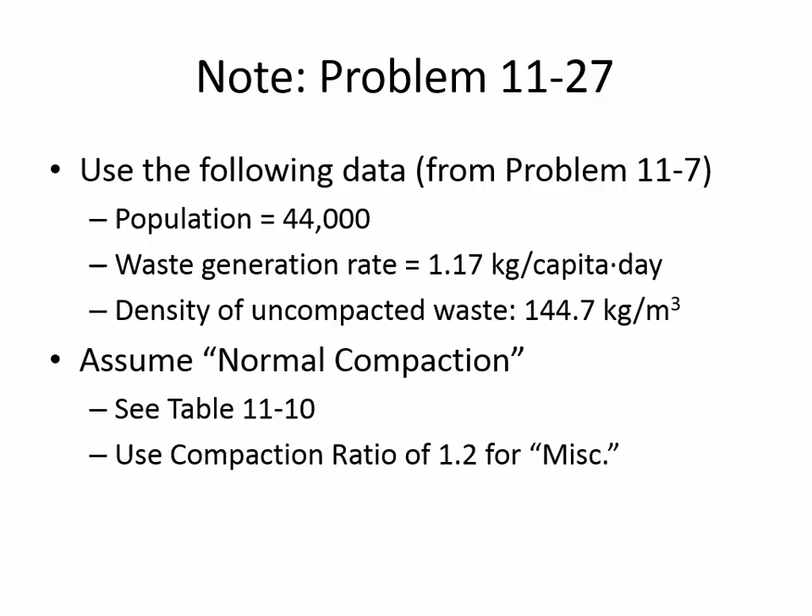Remember when we talked briefly about landfilling earlier in the semester, we discussed preserving the quality of groundwater. One potential source of contamination is that if we bury our garbage, rubbish, and trash, the metals, organic chemicals, and bacteria in those things filter down into the groundwater, which can cause problems related to human health.

What they'll do is extract samples, sometimes daily, sometimes weekly or yearly, depending on how old the landfill is and its status. They'll extract samples and test the groundwater for contamination. If they find anything—any organic constituents or heavy metals—that tells them the landfill has failed and needs to be repaired.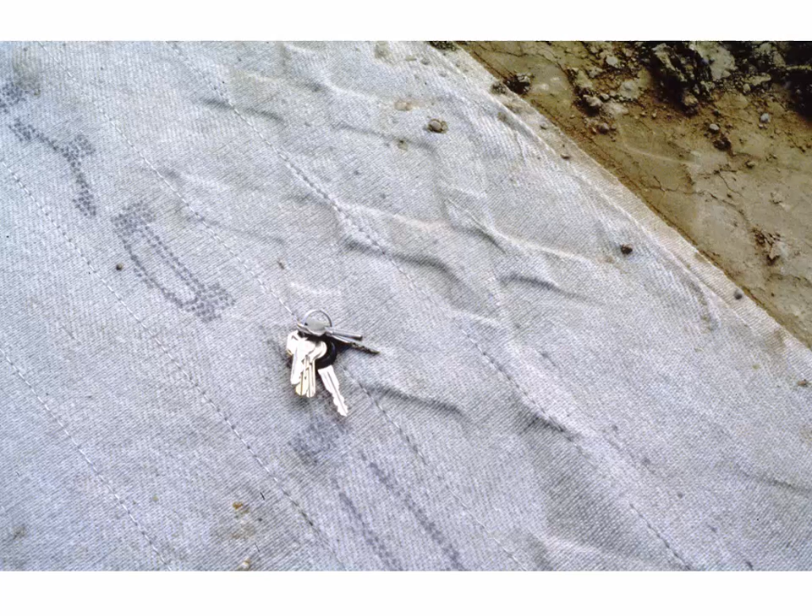The keys that are on this are for scale, to give you an idea that this is a really thick, heavy fabric. This isn't like clothing fabric. Down in the lab they have these bags that you put concrete in, like the heavy-duty bags that crushed concrete can go into, and then a forklift can actually lift the bag and haul it away. It's like the thickest, toughest fabric you can imagine, because a lot of earth-moving equipment is going to be bearing down on that fabric, so it's important for it not to tear.

As they lay out the plastic on big rolls, occasionally there can be imperfections in the plastic. It might be that there was a rock that somehow slipped through. There shouldn't be any rocks in the clay that's underneath the geotextile, but inspectors are always on the lookout for sections that need to be cut out and replaced. So they put a patch on a section like that.

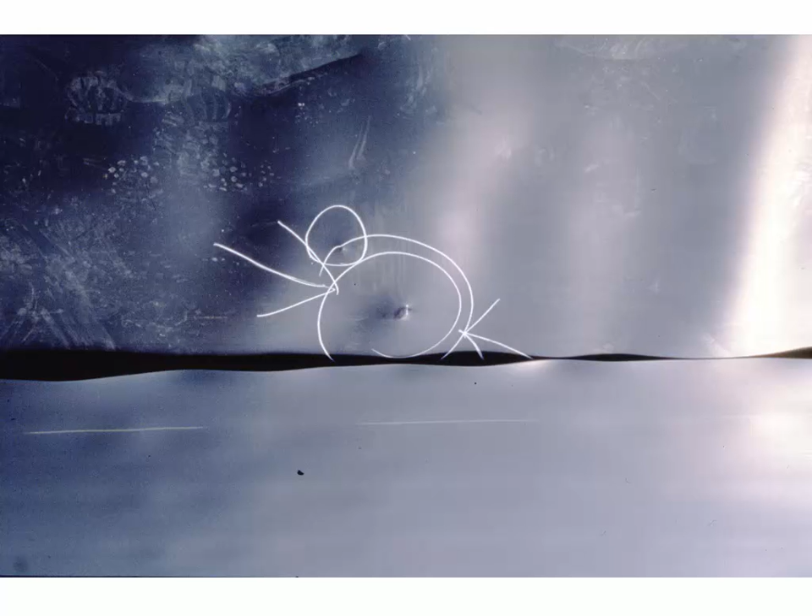You can see the consequences of carelessness. The geotextile can rip, and so that whole section would have to be replaced.

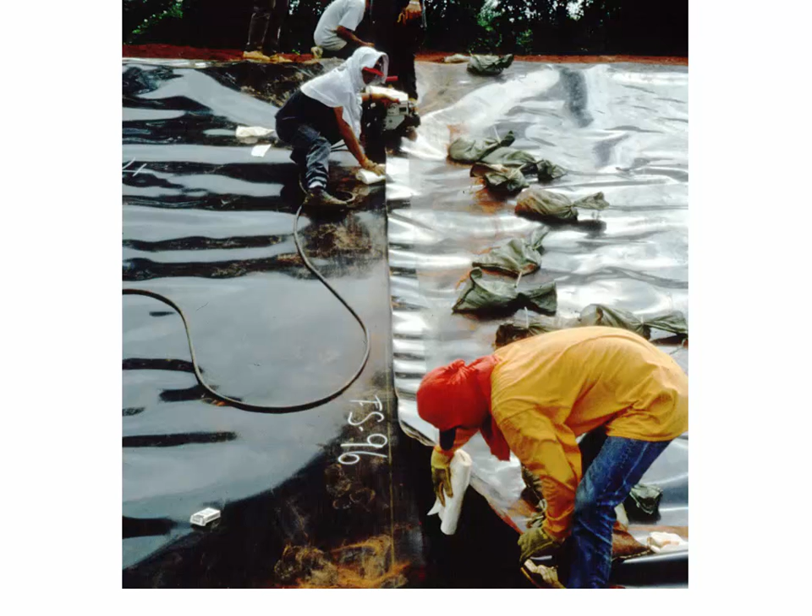So they lay out the rolls, and because they're going to need so much more plastic than one roll, you can't have a section of plastic that's 100 meters wide, so they do it in sections, and then they seal those sections together with thermoplastic welders. They have heat guns that can fuse the plastic layers together, and they actually put two different seals to join it. They have an overlapping section of plastic, with one seal on the left, one seal on the right, and let me show you.

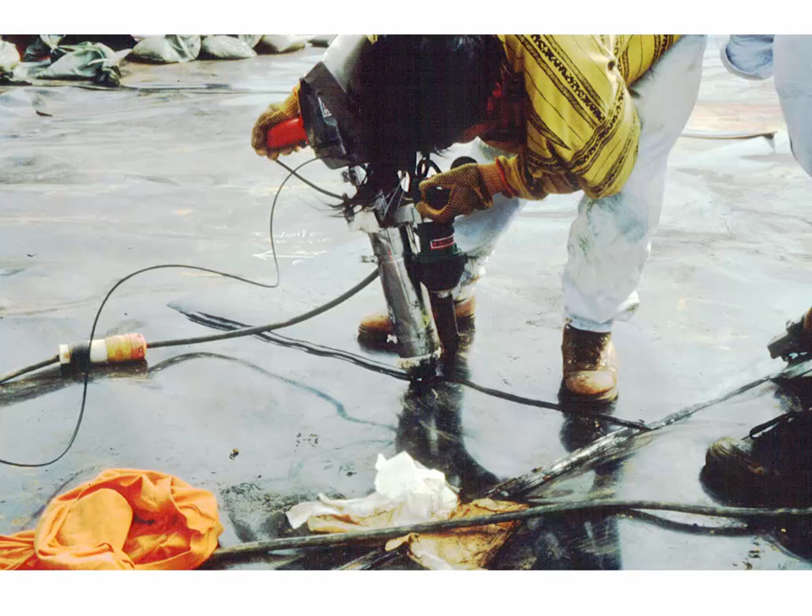Okay, yeah, they're heat sealing it here. More heat sealing. What they're doing is they're testing to make sure that the heat seal is airtight and watertight.

So they'll poke into it with a needle, use a pump to make sure it can hold a certain pressure, wait for a few minutes, make sure that the pressure is holding. That tells them that the welds in the plastic are good. Then they pull out the needle, put a patch on top of where the needle hole was, and then that section is essentially one continuous piece of plastic. It's kind of an ingenious way to make sure that there aren't any holes in the joining of those two sections.

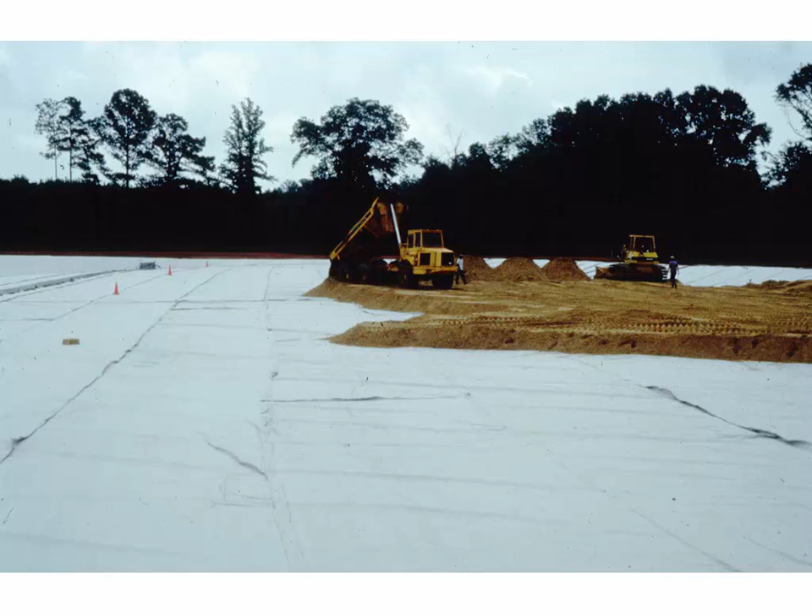No, this is at the beginning of the landfill before the first garbage is brought in. So that's a good question. They would put in all of the plastic for the whole landfill at the beginning, and then they would load it with the first initial layer of soil, and then they would start to bring in the garbage.

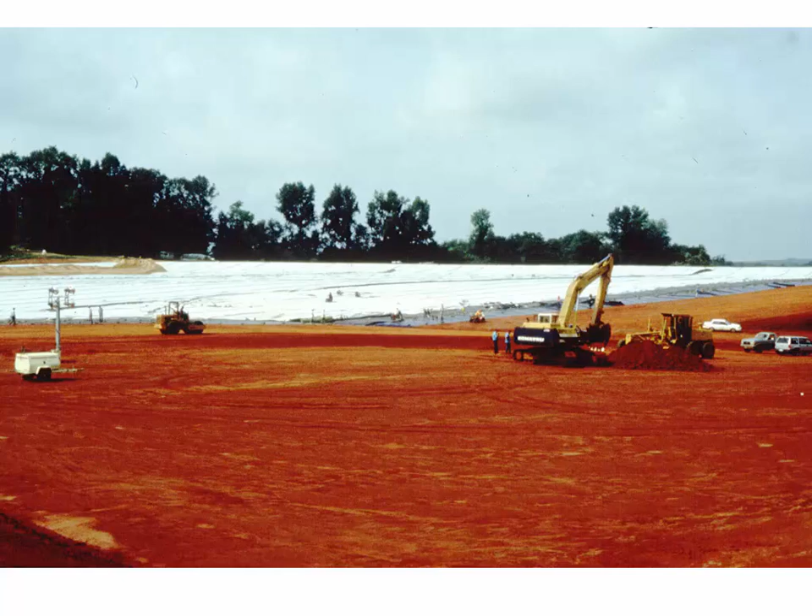And so this is a pretty specialized thing. The people who are laying this out and sealing it together, they travel around the country or the world. They're not staying in the same place every day doing this. All right, so I jumped through some of the pictures kind of quickly there looking for an overhead.

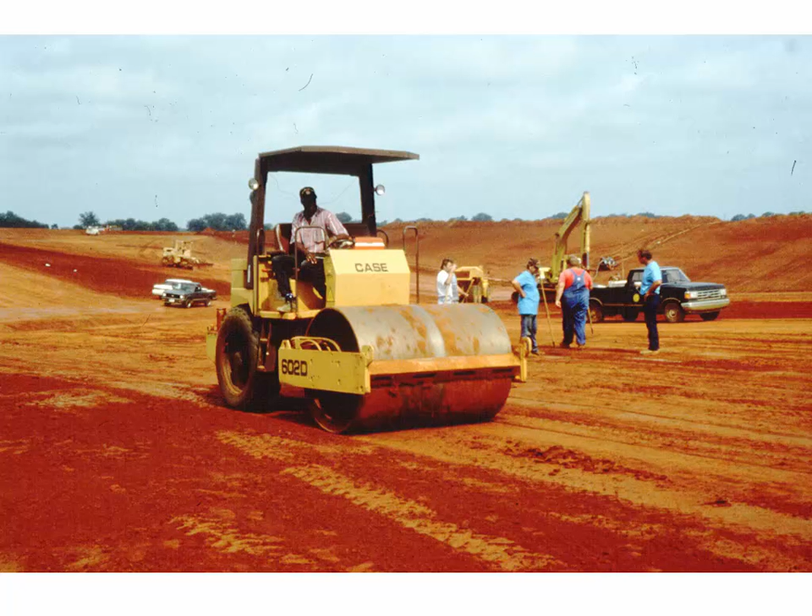All right, so when I was talking about being careful, I'm not driving directly on the geomembrane. That's a fancy word for the plastic they've laid out. They call it a geomembrane because it's in contact with the soil. It's okay to even have tracked vehicles going on top of it if you put a reasonably thick layer of soil on top of the geotextile that's on top of the geomembrane.

All right, there's a couple of different techniques used for landfilling. Let's say we've finished construction. We have this environment with leachate collection underneath, so there's a series of pipes underneath to collect any water that might get loose. There's the plastic, and on top of the plastic there's soil, so we can drive on it.

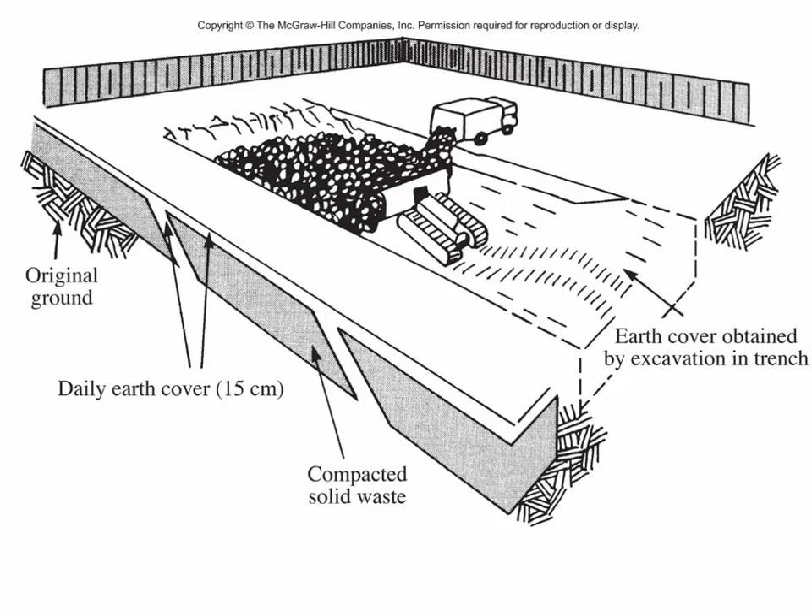By contrast, in this diagram you can see they've excavated all of the land out, so they're going below ground level and building up on the sides of the trench where they put the waste. The main difference is, if you look at where the truck unloads: in the second case it unloads at ground level, and the waste is buried beneath the ground when they're trying not to get too tall. Or sometimes the waste ends up much taller than the original ground level, so the original ground level is beneath, and you just continue building taller and taller.

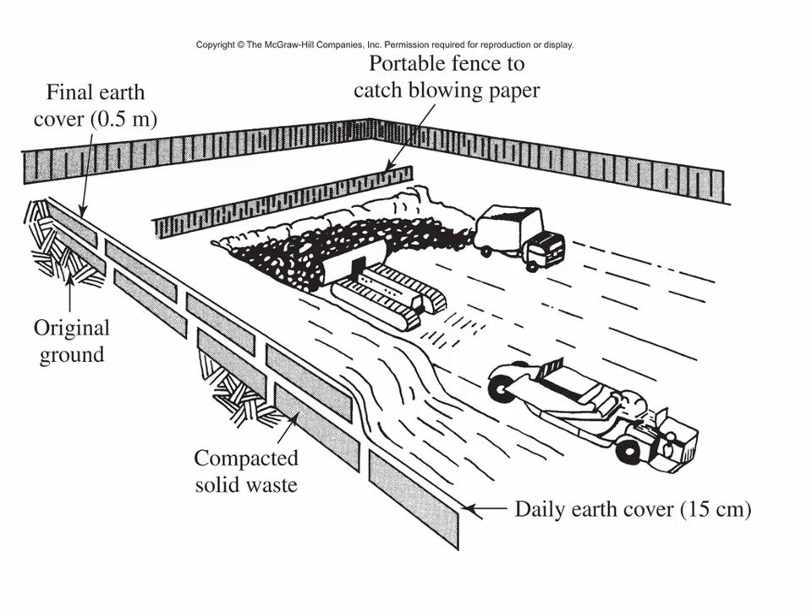When you drive into Dubai, on either side of the road, there's a landfill on 311 from the Dubai-Sharjah border, and they're getting very tall. That's quite high. You mean the area of the bridge? Yeah, as we go from Dubai into Sharjah, just as you hit the border of Sharjah, it's on the right side.

Here is a table that you'll need to use in the homework and in today's in-class exercise that tells us how compactable certain types of waste are. You can see that plastic, for example, is very highly compactable because the volume that your water bottle occupies, if you crush it and put the cap back on, takes much less volume than before it's compacted. On the other hand, metals, especially ferrous metals, don't compact as well. They can only be made to be 3.3 times as dense.

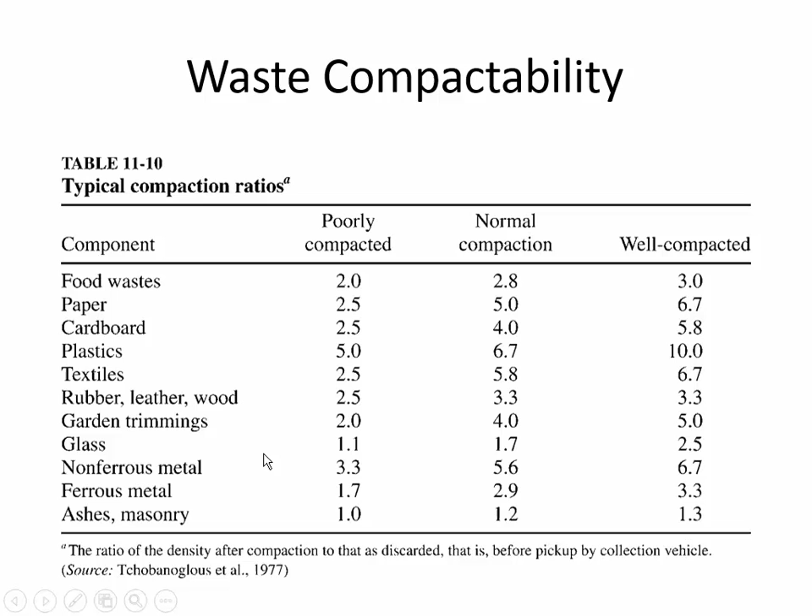Ashes are even less compactable because even before you start to compact them, ashes are already taking up as much space as they need. So we need to create a weighted average of the compactability depending on the breakdown of what percent we have in each category, and that's what we're going to do in the in-class exercise.

The other thing I want to point out is this cross-sectional view of cells, where that's the waste. Underneath the cell of waste is a beginning layer of soil that protects the geomembrane and the geotextile, and then there are layers of soil used as the daily cover.

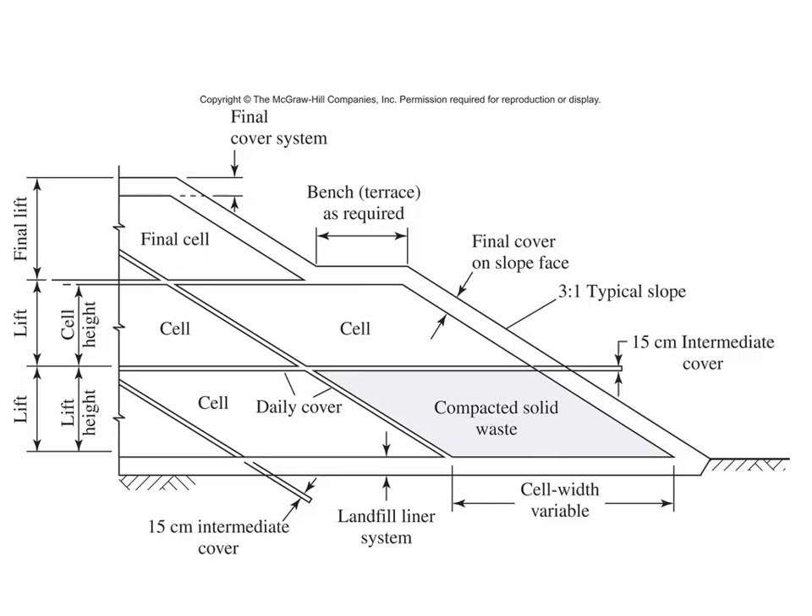So when we do our in-class exercise in a few minutes, you should be thinking about, as a cross-sectional view, what the different layers will look like if you have a certain height limit. If you lay out the layers of waste in lifts of 0.3 meters, and you have to have 0.15 meters of soil on the bottom and at the top for each daily cover, then you can calculate how many lifts you can get before you reach the limit of your maximum height.

And here's another cross-sectional view for leachate collection. These pipes underneath have small cuts in them that allow the water to get into the pipe, and then they drain towards a pump that takes it up to the surface for collection.

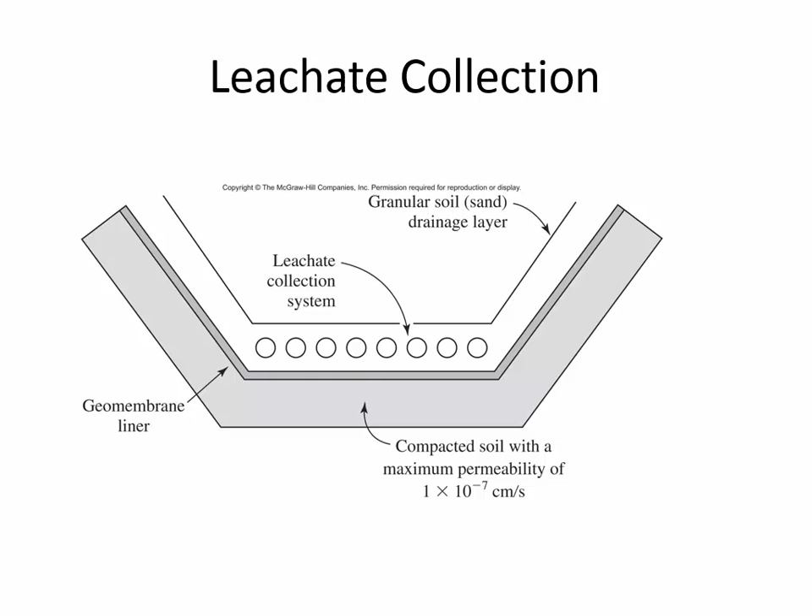All right, so what we're going to do is go through the same process that you'll need to consider in the homework. Let's do these calculations for Sharjah.

These are just ballpark calculations. So let's estimate that the population is 1.1 million people. That's just an estimate because the census is going right now, and the latest data I could find was from 2008. So I increased it a little bit from 2008, but it'll be interesting to see what the census actually says the population is. We'll use a waste generation rate of 2.25 kilograms per person per day.

When it's collected, we assume that the waste has an uncompacted density of 150 kilograms per cubic meter. Ultimately, inside the landfill, it's going to be well compacted. So we'll use this column on the right side of table 11-10 to calculate our weighted compaction ratio.

On the left here, this table is saying how much of the waste is in what category. So 10% of the waste that's collected is food, 55% is paper, and so on. The reason why you need to know this is to create the weighted average of how compactable the waste is. So you're going to multiply these mass fractions by the compactability from the well-compacted column.

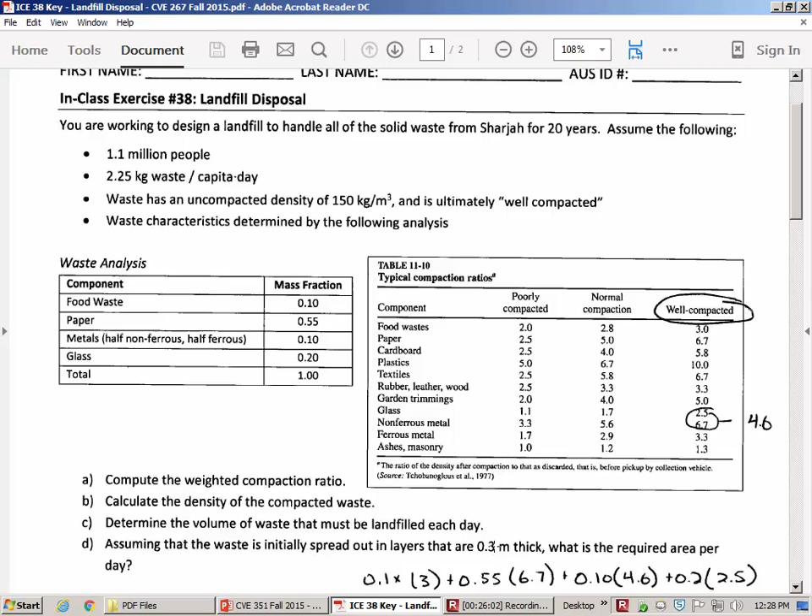So when I was averaging the metals, I mixed up the glass with, it should have been non-ferrous and ferrous, because we're told in the problem statement it's a blend, 50-50 of those two different metal types. So the average, well compacted, should be 5. I've updated my values to reflect that.

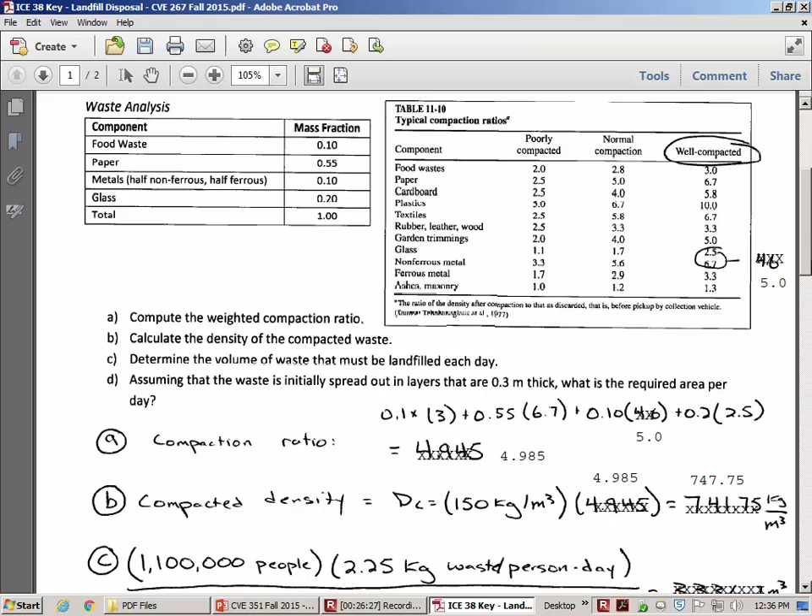So is everybody else getting these same numbers? Yes? Okay. So what do we know so far? What we're saying is, for the waste that comes in every day, we're going to build it up to a height of 0.3 meters. And later on we're going to start looking at how many layers it's going to be and how much soil should be on top of it. But this just tells us the land area that's required each day.

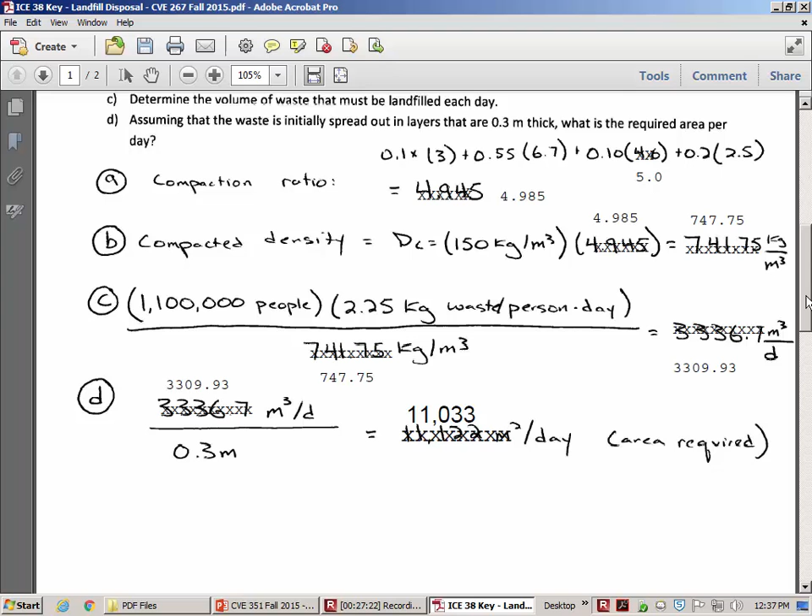Now, sometimes we're going to build on top of an area that has been built on the previous day. So it's not like we need this much fresh land area every day, because sometimes we're going to be putting the garbage from this day on top of another day's lift. But are there any questions so far on these calculations?

All right, so the next thing that we're going to look at is, I ask you to draw a sketch in part E. We know that we have a total of 2.4 meters.

This is what we're going to do. We don't want it to be taller than 2.4 meters. On the bottom is going to be 0.15 meters of soil. So here's soil, and it's 0.15 meters. In total, it should only go this high. So we're going to have waste, followed by another layer of soil, and so on.

So how many days can we stack it up before we get to the limit of 2.4 meters? What I'd like you to do is solve that by just drawing a sketch where each layer of waste is 0.3 and each layer of soil is 0.15. How tall can we get, and how many days worth of incoming waste can be handled by a total height of 2.4 meters?

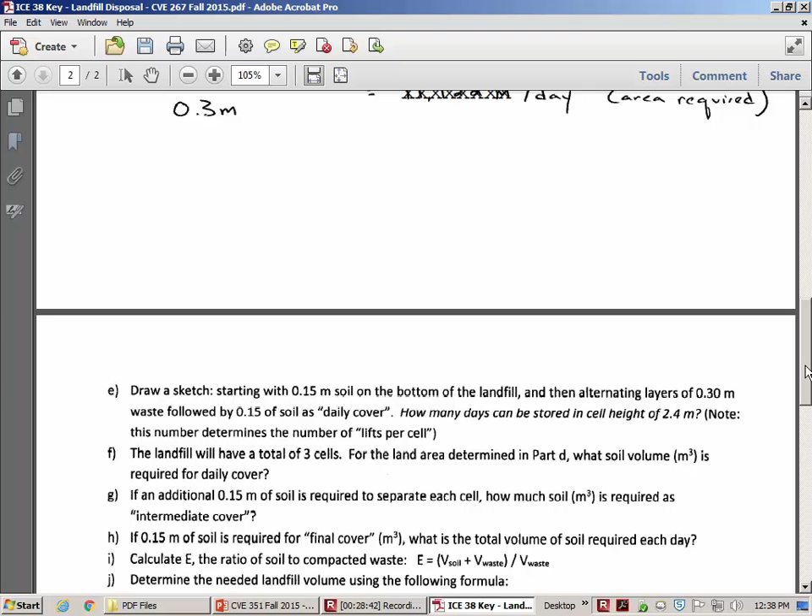Video here, all right. Okay, so

What we have is alternating layers of soil, waste, and soil. The one at the bottom is the protection on top of the liner. And so you can see that here's the first day's discharge, the second day, third day, fourth day, and the fifth day. So if you add up all of those layers together, it should be 2.4 meters.

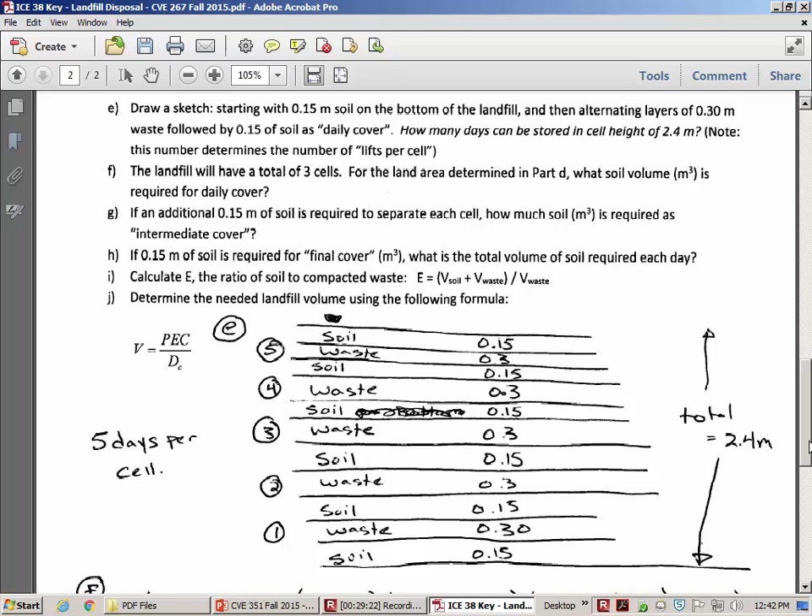So that tells us the land area that we found in the previous part. It should be the land area of 11,033 square meters. We can use that land area for 5 days until we finished one cell. But we can have more than one cell.

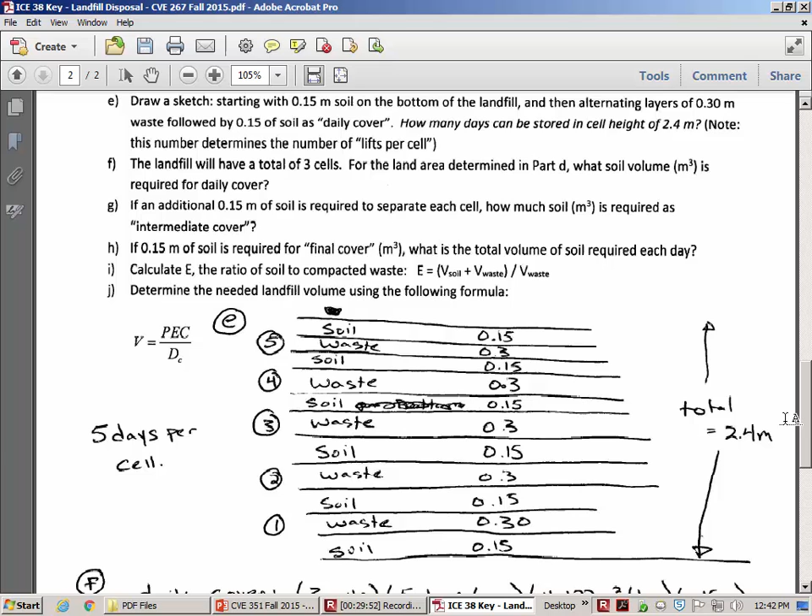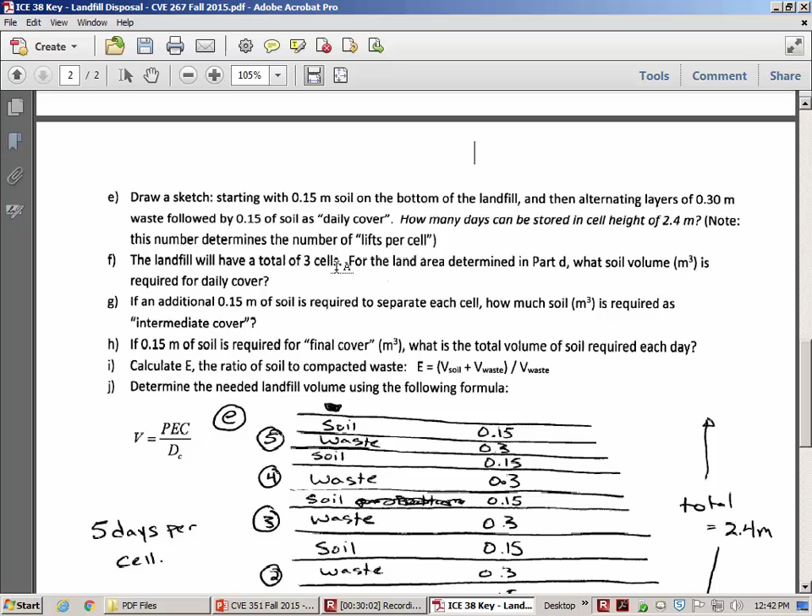We can then start building on top of it again, but what we do is we'd put in a thicker layer. Instead of just having 0.15 meters of soil between cells, it's regulation to usually have more than that. So here in part F, what we're going to say is there should be 3 total cells, where what you're looking at here is only 1 cell.

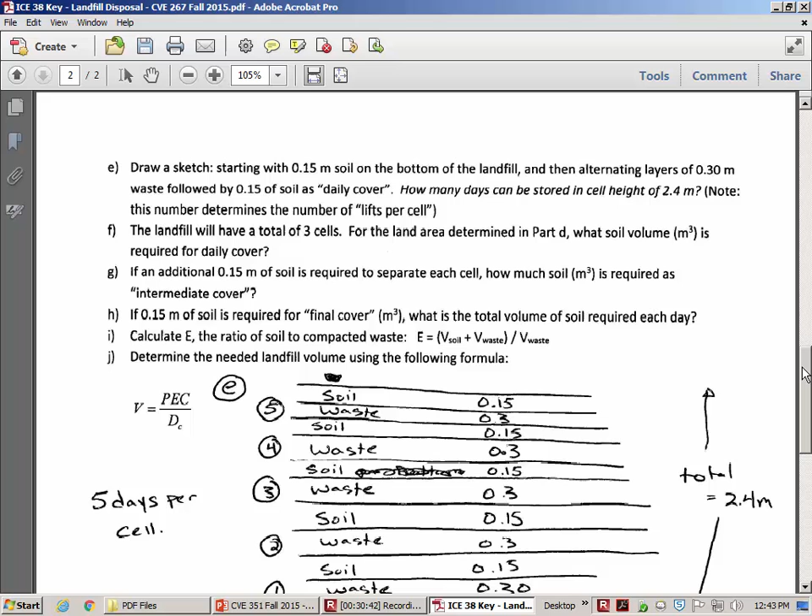Based on the land area that we found and 3 cells, how much daily cover is there? We're using 0.15 meters depth for daily cover. Part G is saying that if we want an additional 0.15 meters of soil to separate each of the 3 cells, how much is needed for intermediate cover? Then we cap it with a final cover. So F, G, and H calculate the amount of soil required.

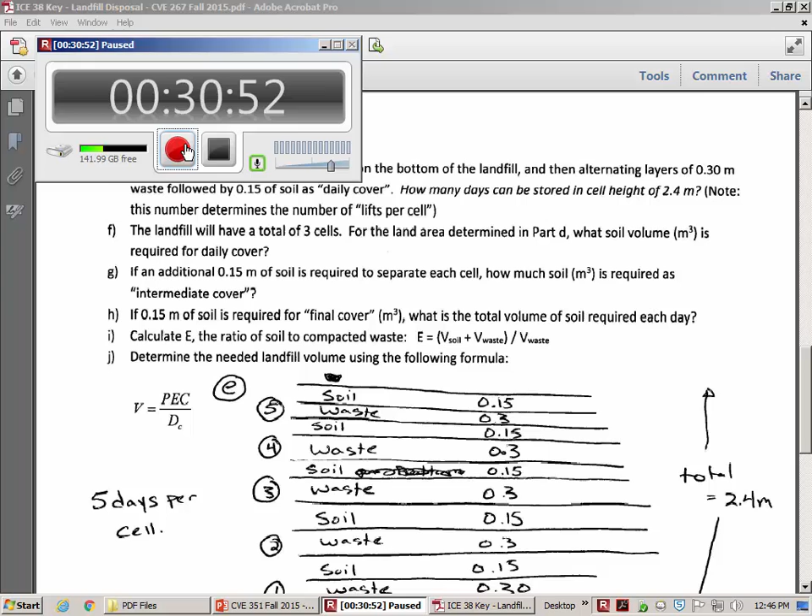Here's the idea with the daily cover. Each day we're putting in a layer that's 0.15 meters tall, just so the birds and rodents don't get in, and so it doesn't blow away. That's what this 0.15 is for.

5 days is how tall each cell is going to get. We're going to put 5 layers inside our cell, and in the problem statement it said we're going to have 3 of these cells stacked together. So 5 days, 3 cells total, and our land area is what we're going to multiply it by to find the volume. This is how much soil we need every 5 days to provide that daily cover. It's the last thing they do before they turn out the lights and go home for the night - they put soil on top of all the waste just to keep it in place. That's how much you need.

It's called daily cover because it's put on every day, but the way I've calculated it is how much we're going to use every 5 days, because this area can have more than one lift on top of it.

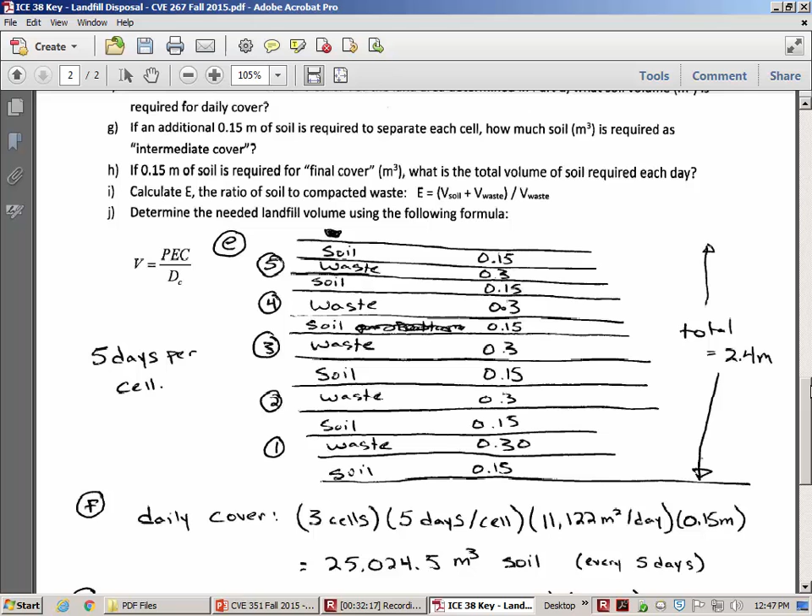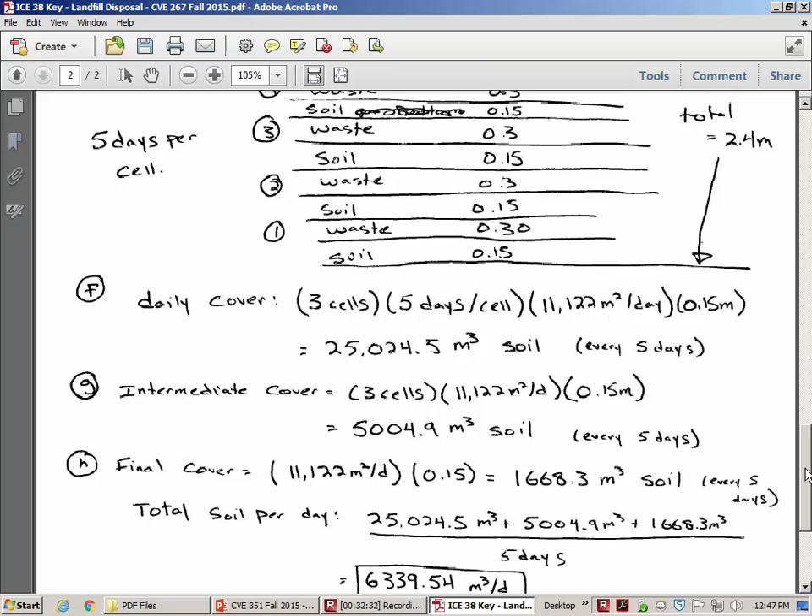The next thing we need to look at is the intermediate cover. That's what separates the cells. There's a certain volume of soil for that, and the final cover. Those are all expressed on the basis of every 5 days. So if we want to find the total soil per day, we just divide those 3 volumes added together by 5 days, which gives us cubic meters per day. That's the soil we're using in the landfill.

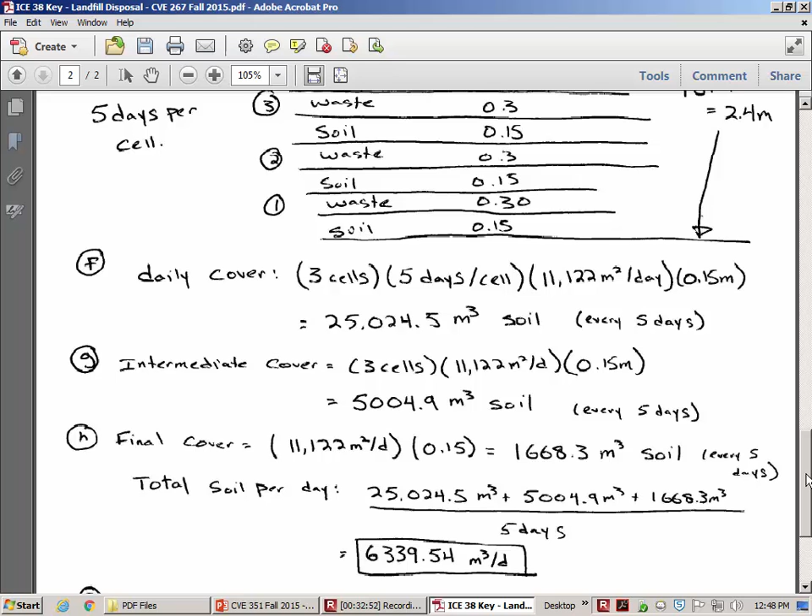The last steps are to come up with, this is kind of like an efficiency ratio. It's the ratio of how much waste is in the landfill relative to the amount of soil that's in the landfill. So you calculate E, and there are 2 ways to find the total volume.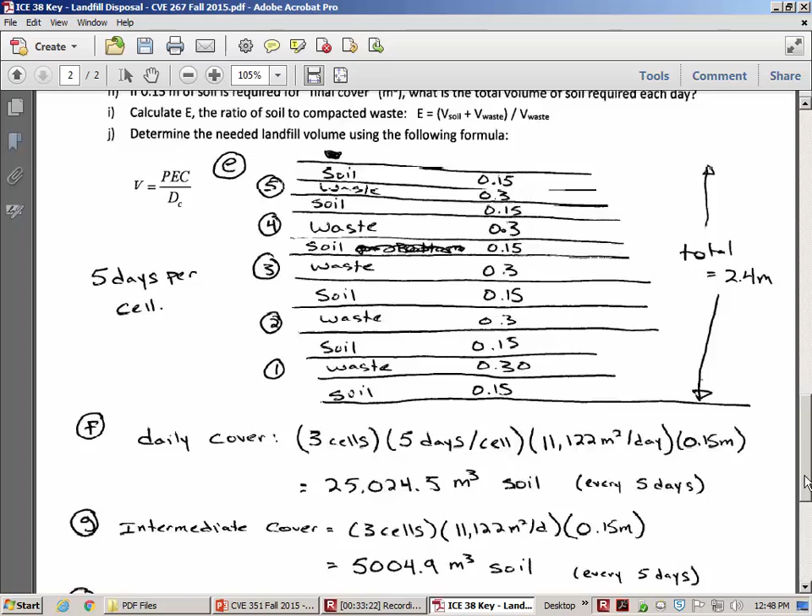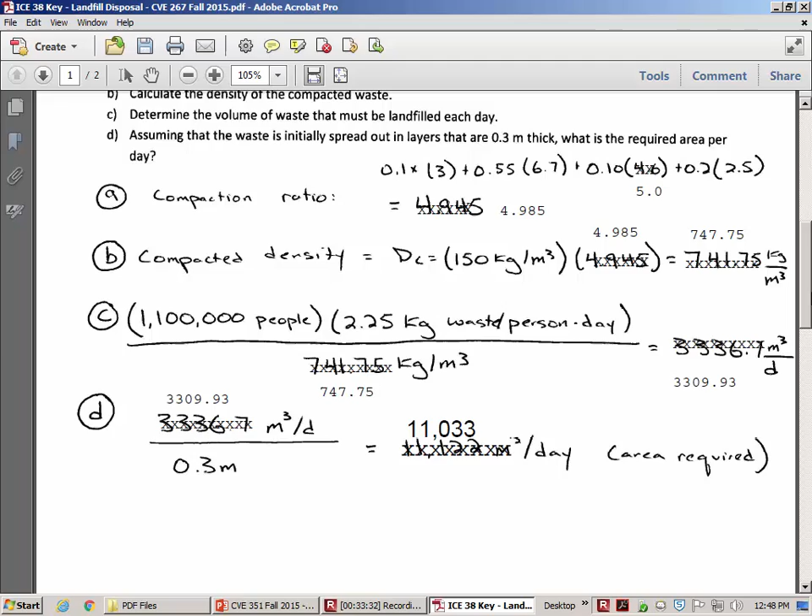You could just add this number - this is the volume of soil. If you add the volume of soil to the volume of waste we got earlier on, let's see, where did we get that? The volume of waste, here it is, 3309 cubic meters per day. That's the waste. Here's the volume of soil. If you add the 2 together, that tells you how much landfill volume, including both the waste and the soil, needs to be stored each day.

If you multiplied that combined volume by the number of days per year and the number of years in the lifetime of the landfill, that tells you in total the volume that's required for it.

Now this other approach, rather than just adding the waste and the soil together, the book goes through another idea of calculating the E of the landfill and then multiplying that by the number of people, the waste generation rate. But we kind of already did that - we already factored in the 2.25 per capita generation rate and the number of people. So we could short circuit this intermediate step if we want to.

In the homework, you should go through a similar process of estimating how much volume the waste is going to occupy, how much volume the soil is going to occupy, and then if you know the height of the landfill, you can calculate the total land area that's needed.